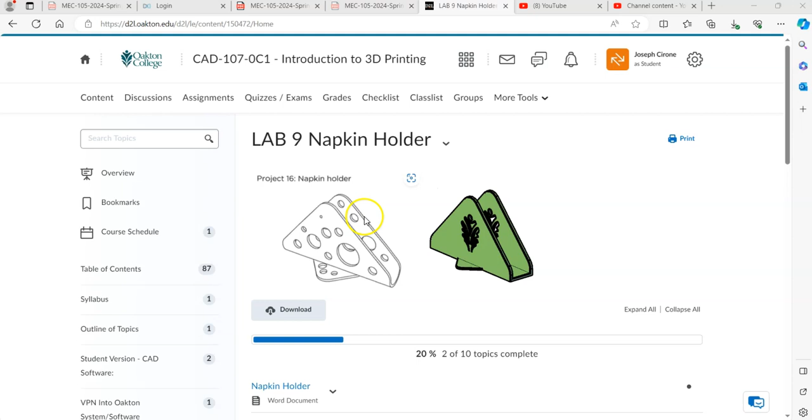Hi, Joe Cirone. Today we're going to model and print this napkin holder. We can find the dimensions right here.

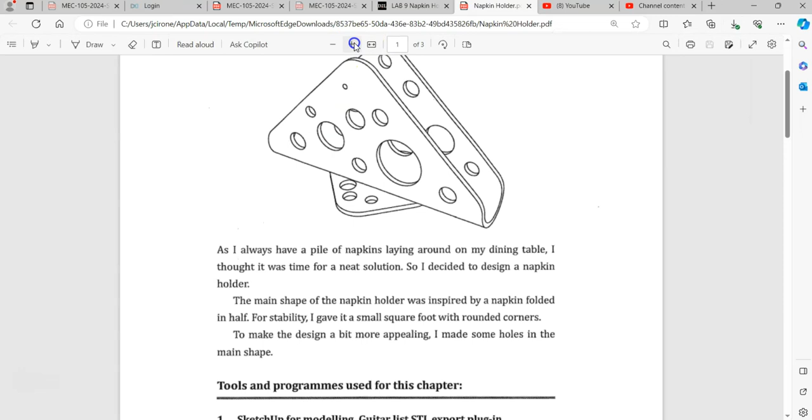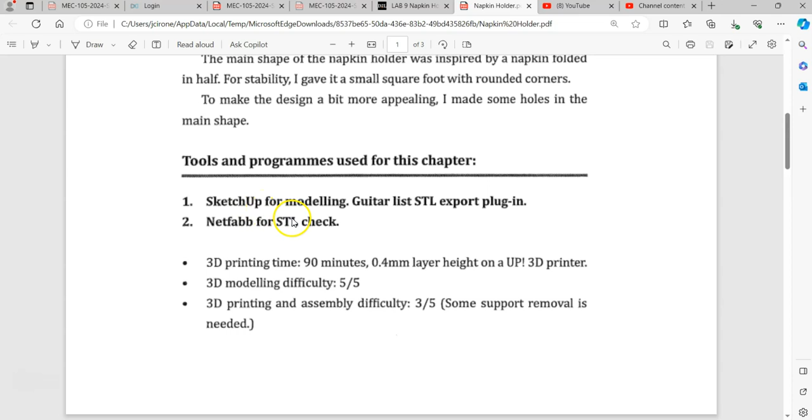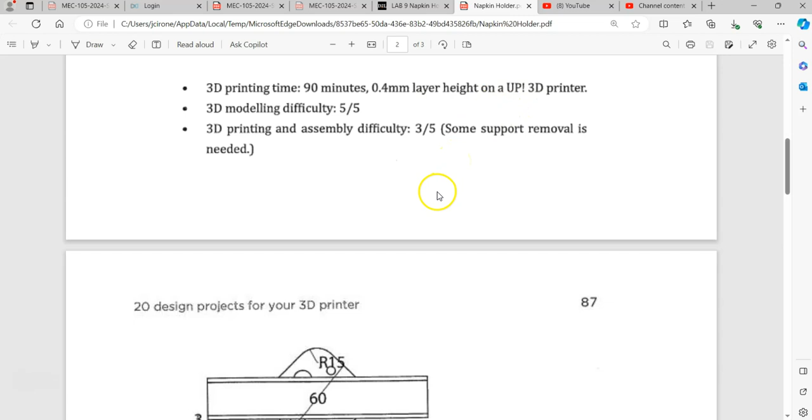This is taken from our 3D Printing Projects textbook, using SketchUp and then exporting the STL file. 3D printing time is 90 minutes at a 0.4 millimeter layer height using an UP 3D printer. We're going to print these on our Bosch Dremel and Ultimaker printers.

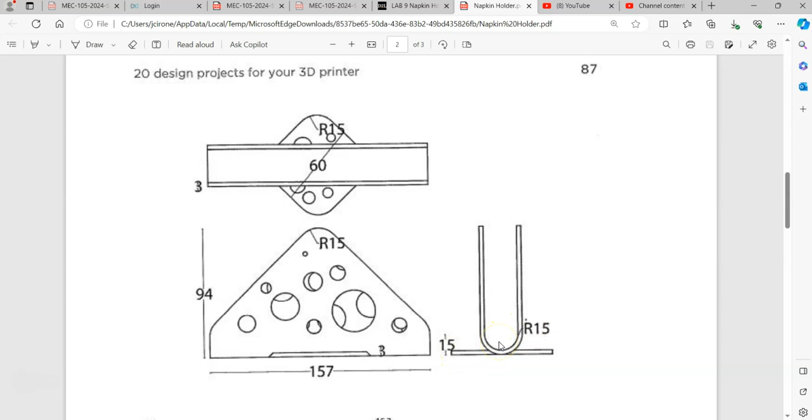The drawing is made in millimeters, and so we have this drawing that's 157 by 94 millimeters if we take the length and the height, and then the thickness and the radii are given here for these different features. We have the base, that's the base right down here that holds this triangular shape to the base.

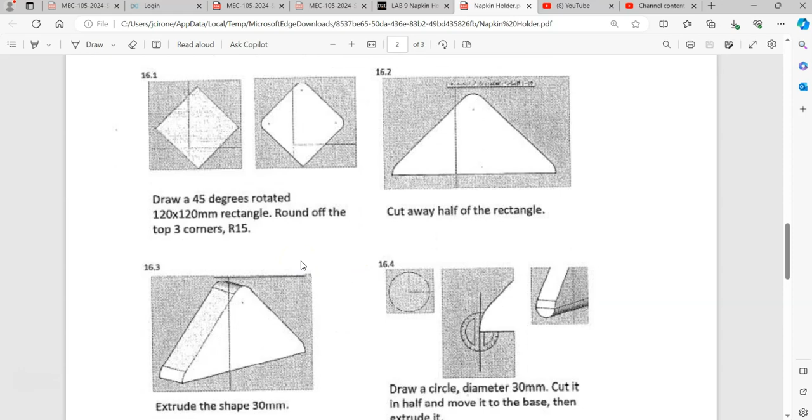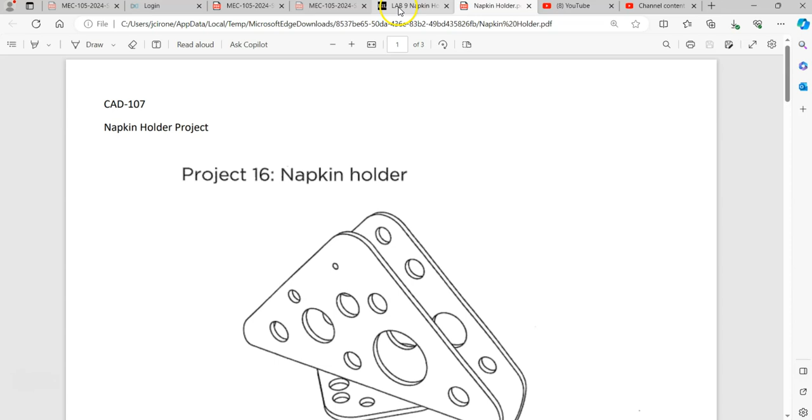Essentially they go through the modeling aspects for it. We've already worked with some of that, and so what I've done is I've given a student file.

We're going to work with the newer version, which is going to use inserts. So I'm going to download this file and open it.

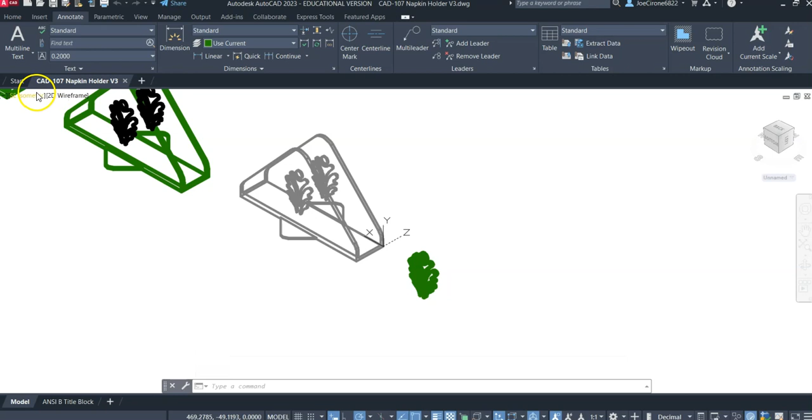This is an AutoCAD file, and essentially if we look at this in an isometric view with conceptual visual style, we can see that we have this oak leaf. What we're going to do is print the oak leaf using horizontal expansion, so it's slightly smaller and fits in here, kind of like a jigsaw puzzle.

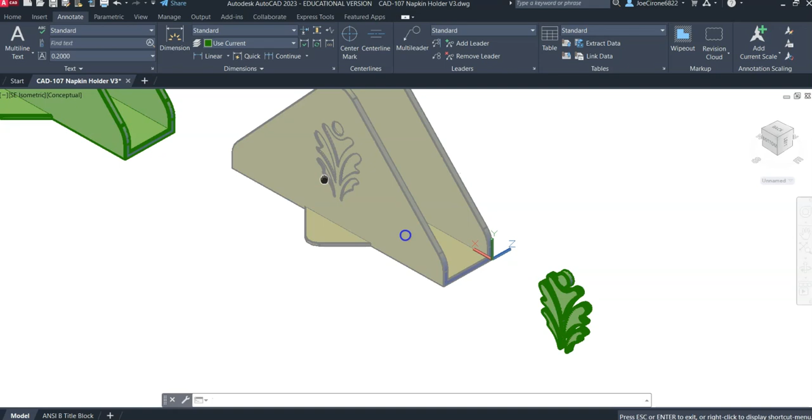And then if we look at how we modeled this exercise, we can go to a top view.

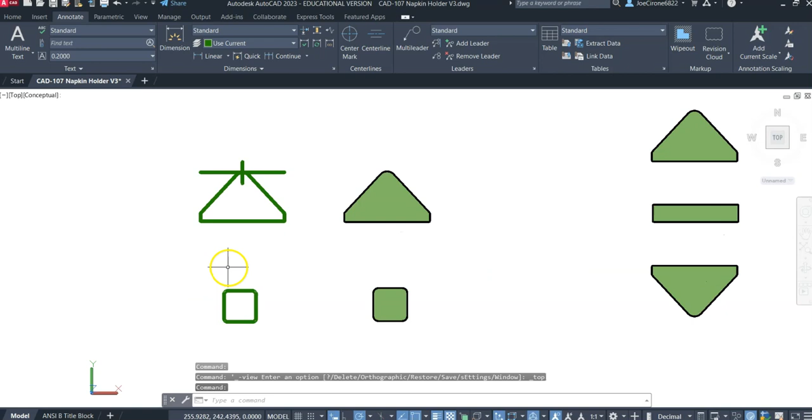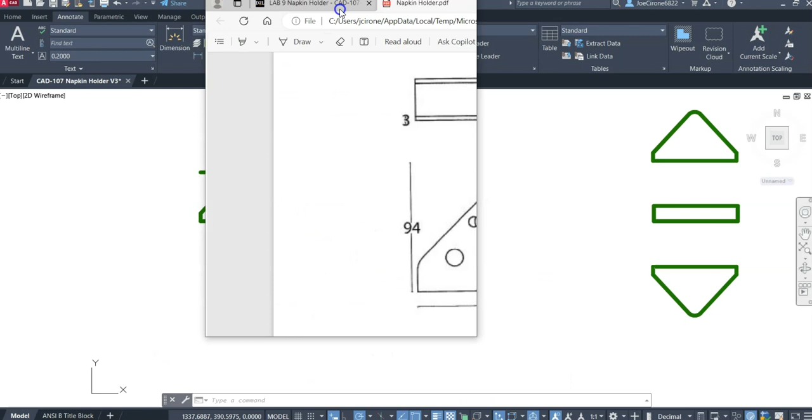If we look at our print, we have this triangular shape that's 157 millimeters by 94 millimeters. And so if you've opened up the student file like we have, we can analyze this, and we can see that that's 157 millimeters. And then for the height, we can just track a line.

From this intersection here, and if I click on that, we can see that that's 94 millimeters. And that's the dimensions that we want.

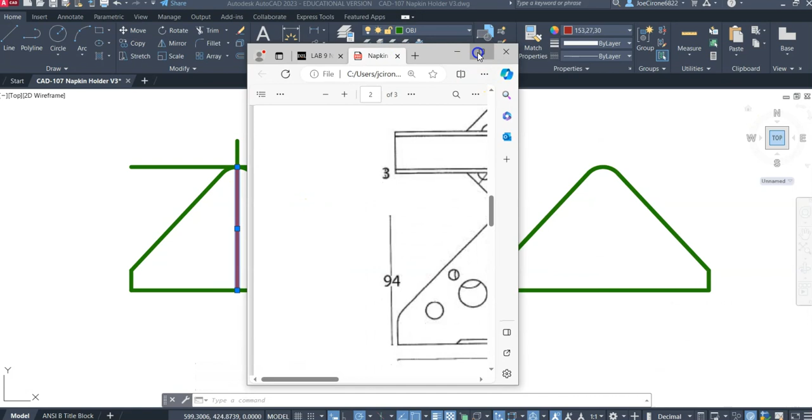So as we're designing for 3D printing, we want accurate dimensions. But as we're making certain products, this is sort of a consumer product, we have some flexibility.

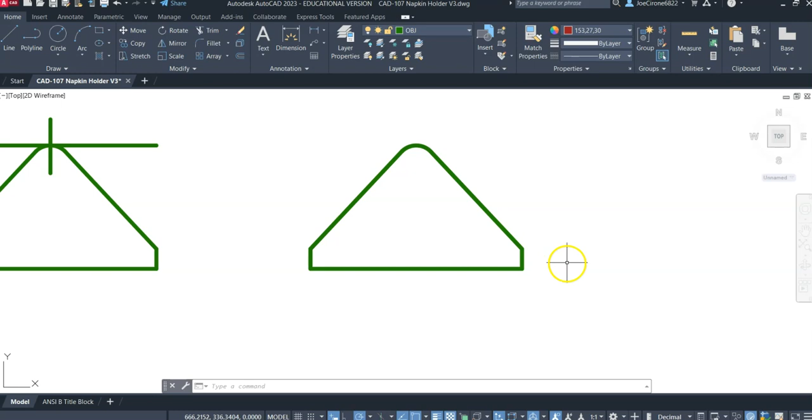Creativity. So what I've done is I've drawn that shape, or provided that shape, and then showing how that is modeled, trimmed it, gotten the basic shapes. And so these are the geometries, and notice that they're closed polylines.

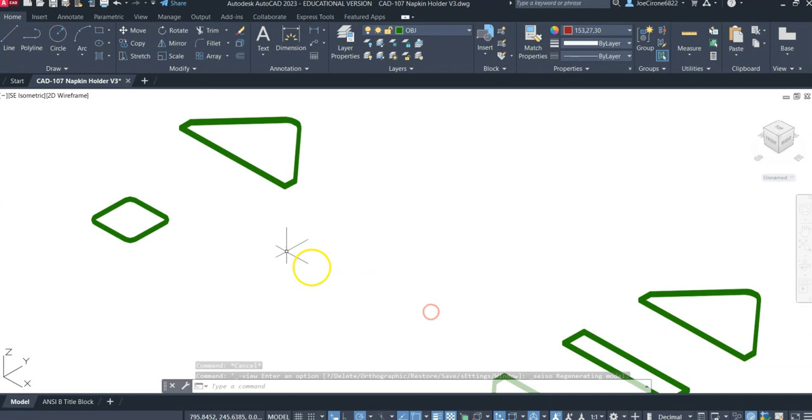And then what we've done here is to extrude these parts. So if we take an isometric view, here's the 2D geometry. And then what we did was we either presspulled or extruded it.

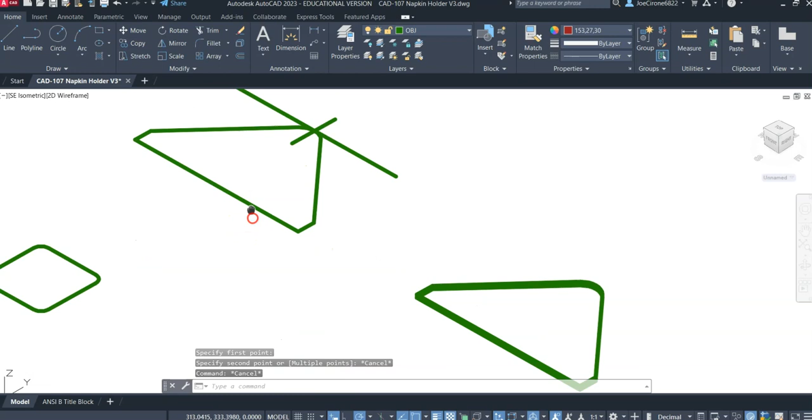If I measure the distance, I can see that that's 3 millimeters. And so to do that, what we would do would be using a 3D workspace.

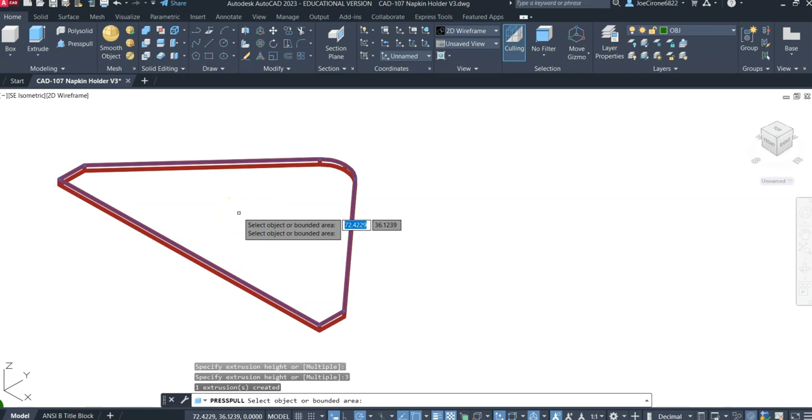We can either use extrude or press pull. Press pull is a little easier, we make that 3 millimeters. And then we can verify that with conceptual. All right, and so that's how this geometry was created.

And this is the base, and it's the same. If we go through and we look at the dimensions for the base, we'll find it.

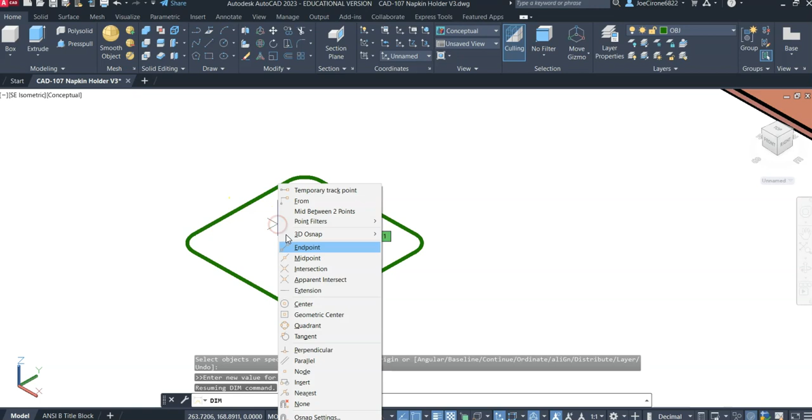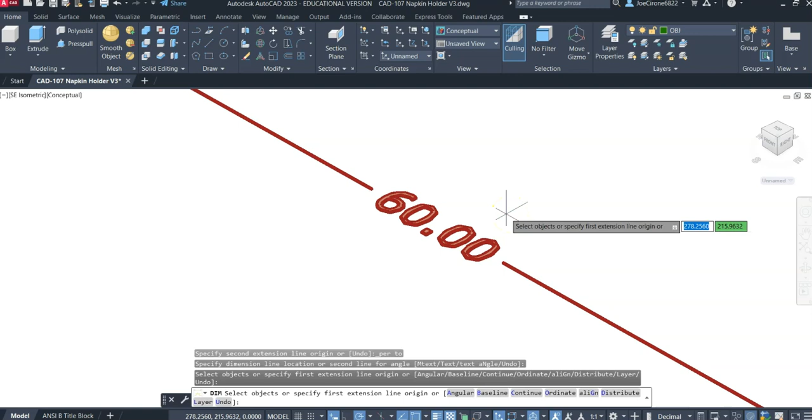We've got this 60 millimeter by 60 millimeter rectangle. And then we're going to take that rectangle, and just like we did with the other side, we're going to extrude that 3 millimeters. And then we're going to assemble it.

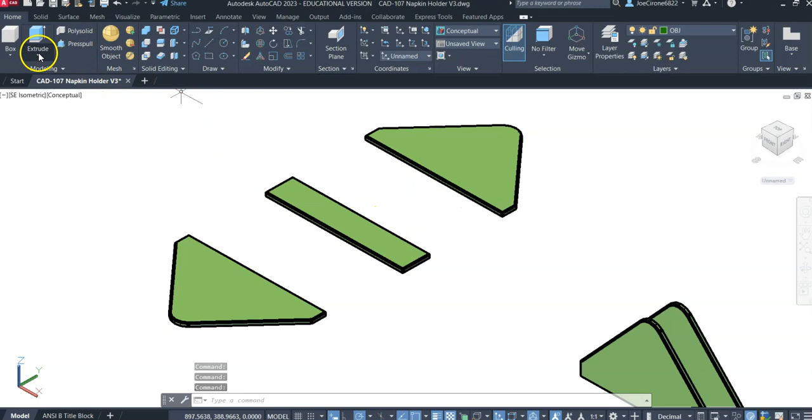And so after we've extruded these 3 parts using either press, pull, or extrude, we can use 3D rotate. We can select that geometry, hit enter, put the gizmo down here in the corner, and then we can select this red axis as our axis of center for the axis of revolution.

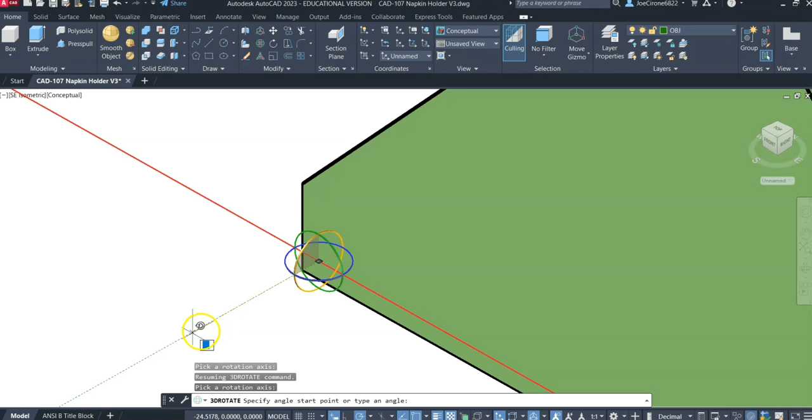And notice that I'm using polar tracking, and that's what this button is here. Polar tracking will keep things straight, but if you have difficulty with polar tracking, you could use ortho mode as well. And so we're going to rotate this one as well.

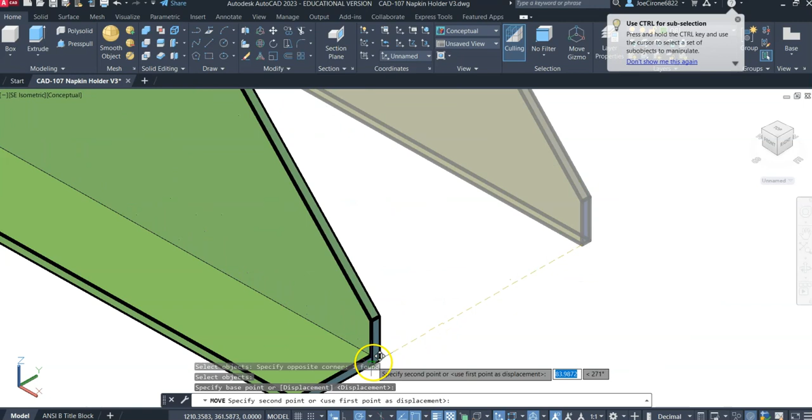And before I rotate the other one, I'm going to put it together. So what I'm going to do is move it, and we can just use regular move commands from this end point. This end point.

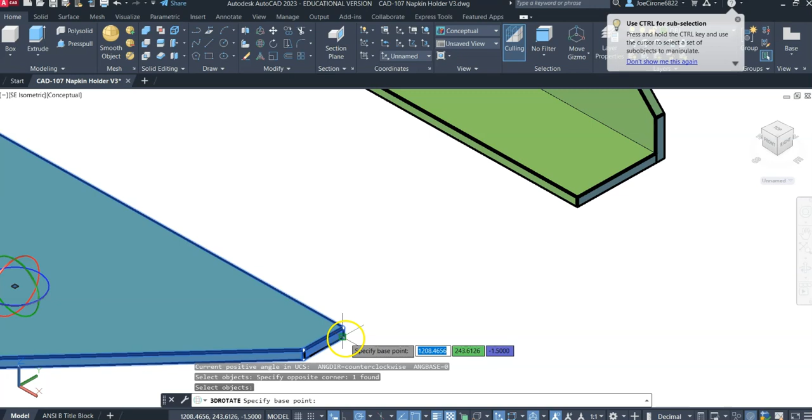And then the same thing with the other side. We can 3D rotate that. Place the gizmo at the corner here. Select the axis of revolution. Track that north, and then track that this way. Move it.

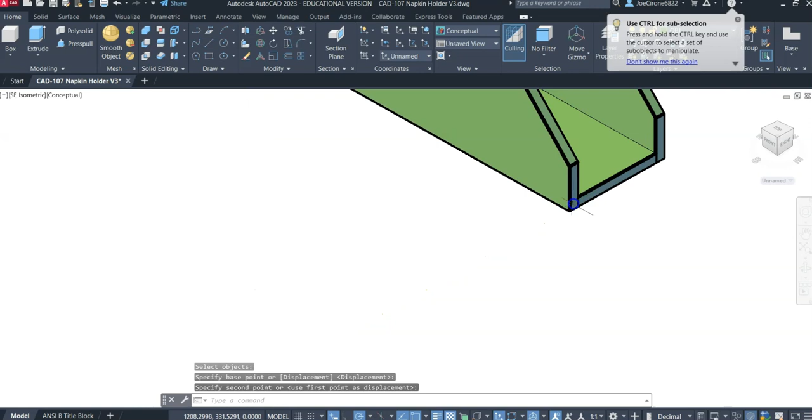Once we have created that, we're going to union that together. Unioning it will be like glue, because we could still move these components otherwise - they're not glued together. So once we place them in the proper configuration, we'll union those, and then we'll combine them.

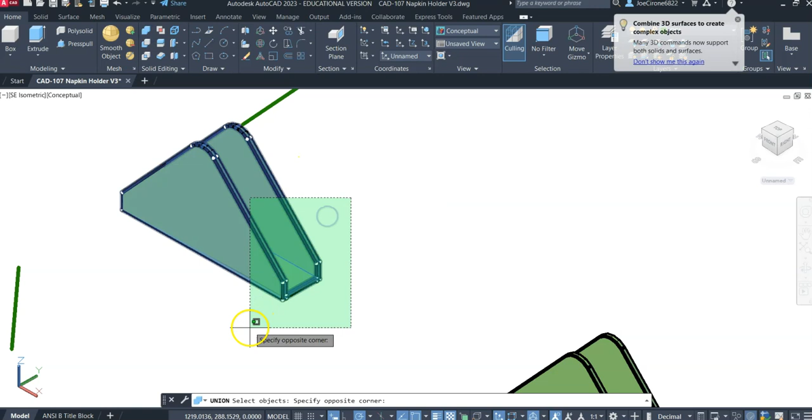You can see we've extruded this bottom shape as well, and I placed that bottom shape on the bottom here. That's a little bit tricky. The way I would do that is to move it in wireframe and place an X on the bottom of the geometry, so if I were to repeat that, we want to be able to move this from this intersection to this intersection.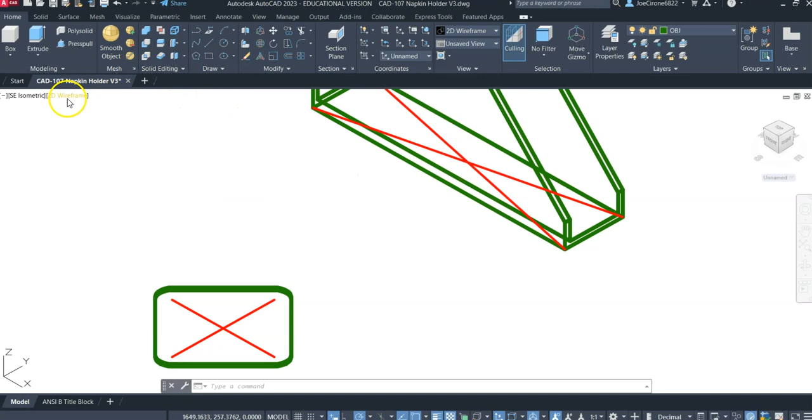If we were to select the move command, you can select move, hit enter, and then move it from this intersection to this intersection. Verify it, conceptual, and then we would union that together as well.

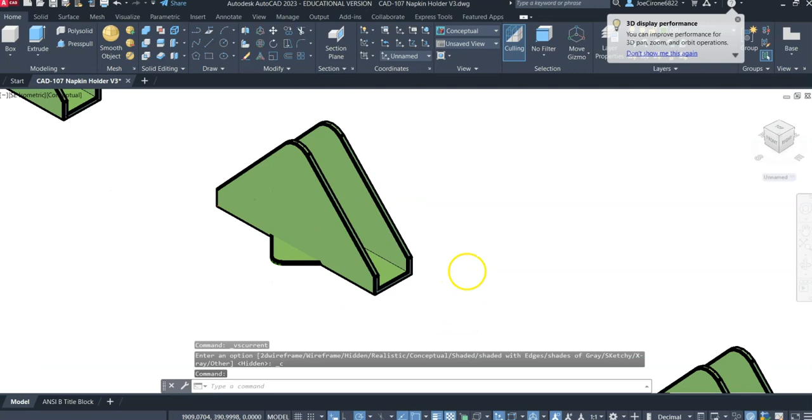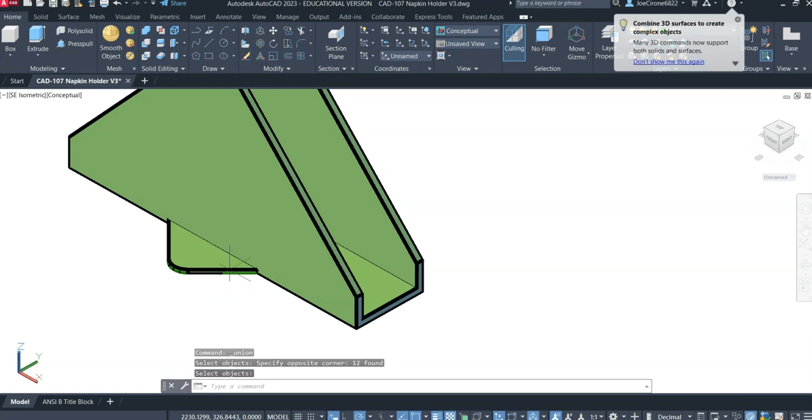Once we have those shapes, we would union those - same process. I can see that these other ones have been unioned, this one is not. So what we would do is union that: select these 2 shapes, hit enter, and now they're treated as one solid geometry.

So to create and put the oak leaf onto the napkin holder, what we want to do is extrude this, and we want to extrude that. If I check this piece here, let's see.

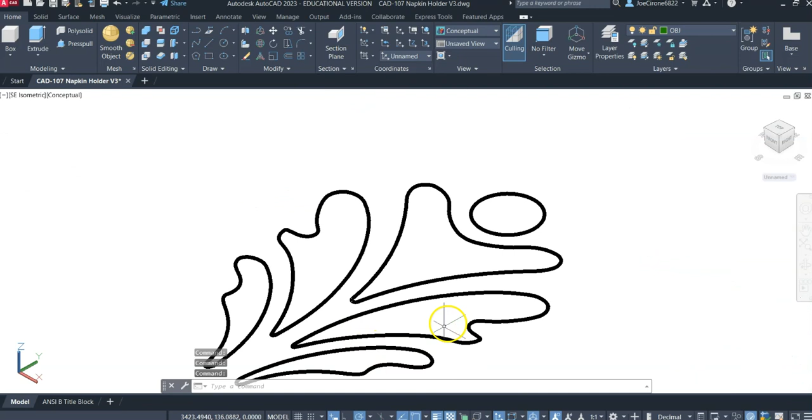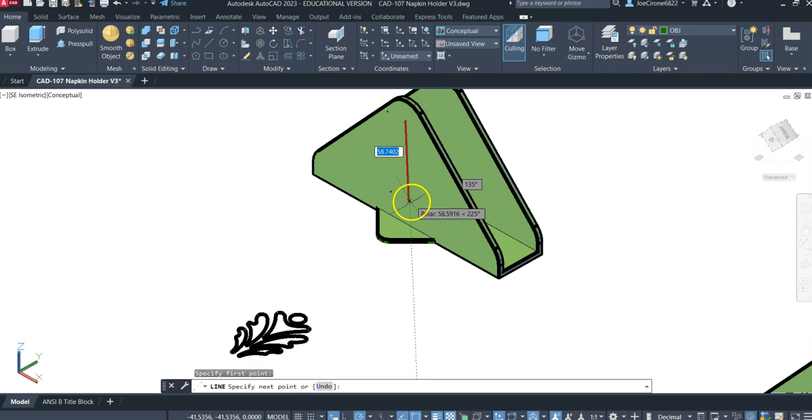We're going to extrude it 2 millimeters, and then we're going to subtract it. We're going to line this up with a line from the center here, and I'm just going to track this down in the Z direction to this midpoint.

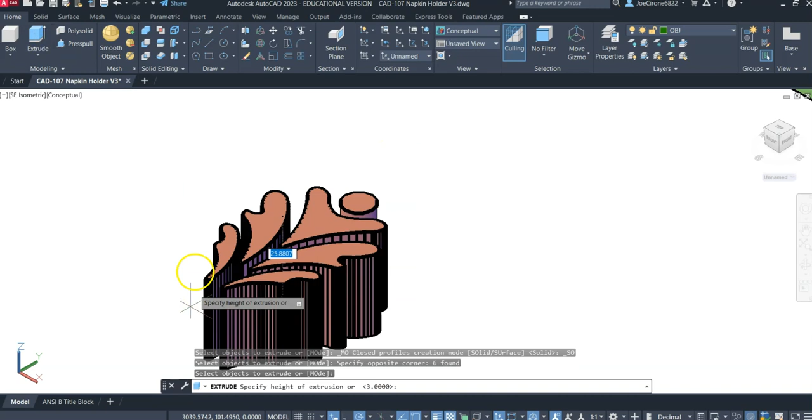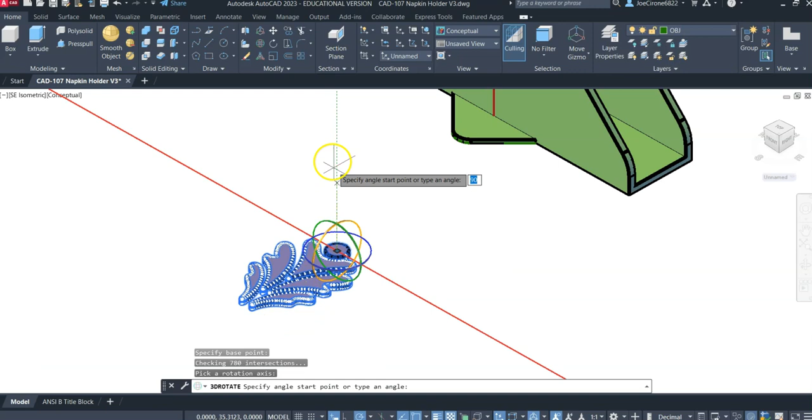And then I'm going to extrude this 2 millimeters. And then what I'm going to do is I'm going to 3D rotate it and move it. I'm going to put the gizmo right at the center here, and I'm going to select this as my axis.

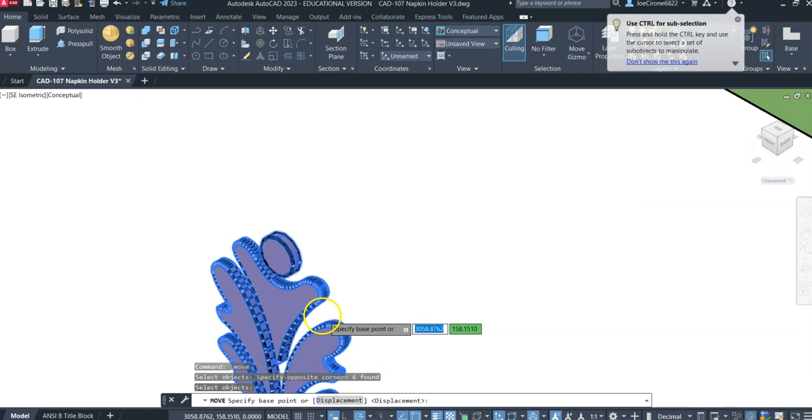And then I'm going to move it again over to this area here, and I'm just going to place it on this with a nearest O snap. We want it to be attached.

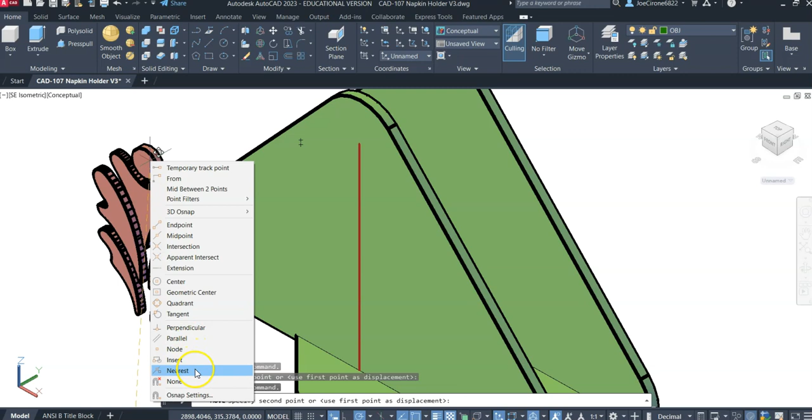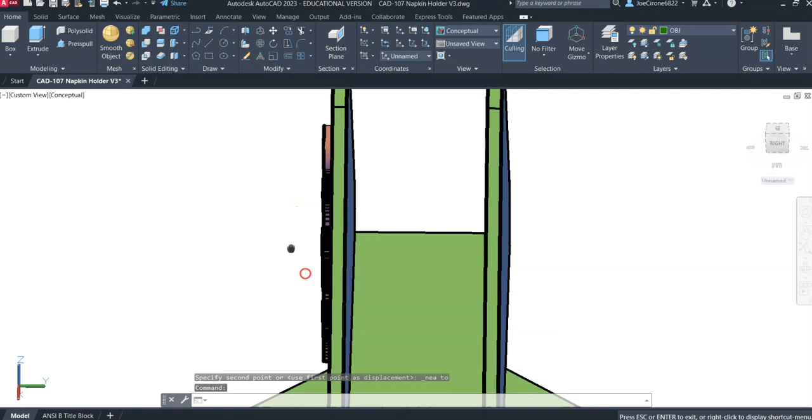Now that I have placed that onto the face of this other part, what I want to do is press it in just a little bit and then subtract it. So we're going to use a 3D move command here, and then we're going to subtract it.

One trick that I like to do is create a copy of this line, but actually I think I have a second set of geometry there that's going to be fine.

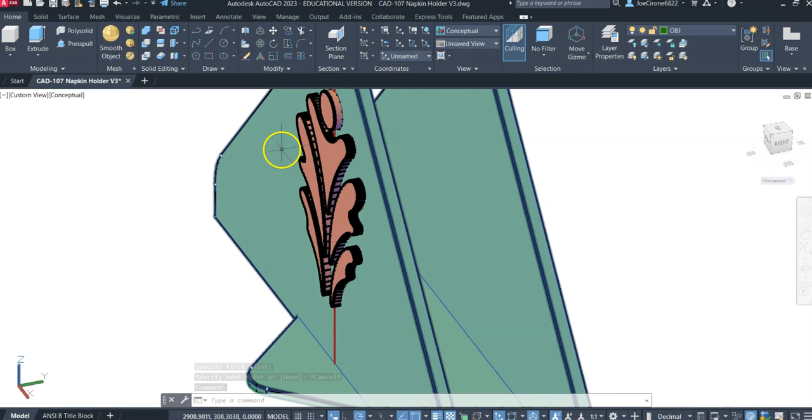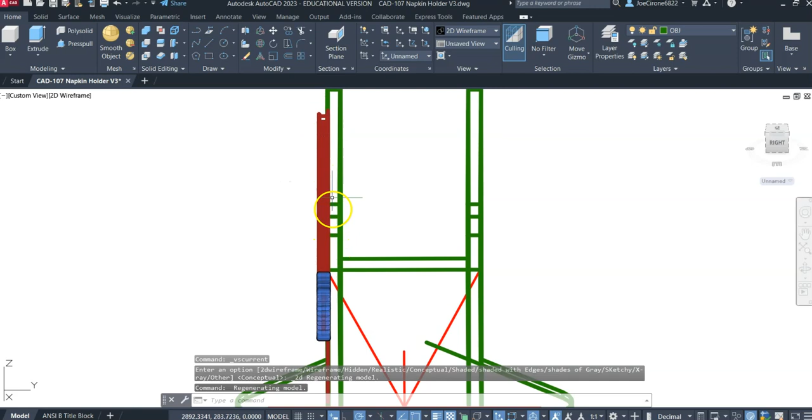So we'll subtract this, but before we subtract it, we need to press it in just a little bit and then subtract the geometry, because right now we just have the two surfaces against each other, and we can see that in a 2D wireframe. If we look at that, this does not intersect with this green geometry here.

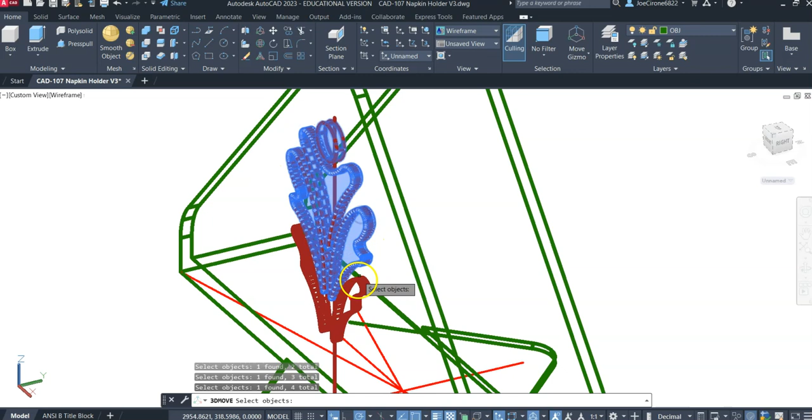So we're going to make that so that it does by using a 3D move command. We'll say 3D move, and then select the geometry for the oak leaf. Hit enter, and then grab this axis right here and push it in 2 millimeters.

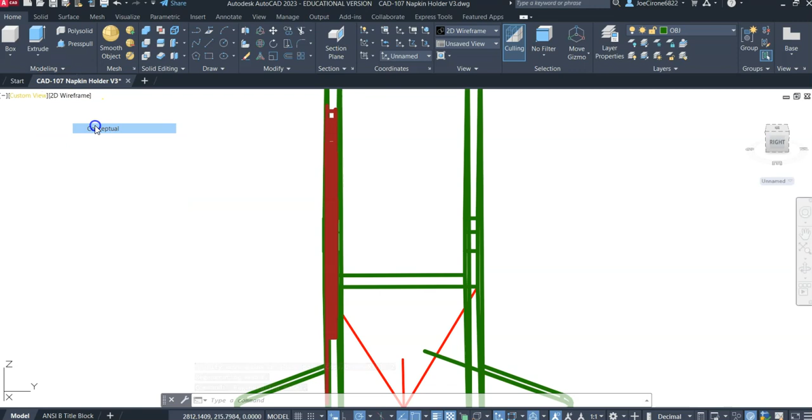If we look at that, holding shift and the middle mouse wheel, we can now see that it goes in. Let's check and see if we didn't bring it too far. It goes up to the face, which is fine.

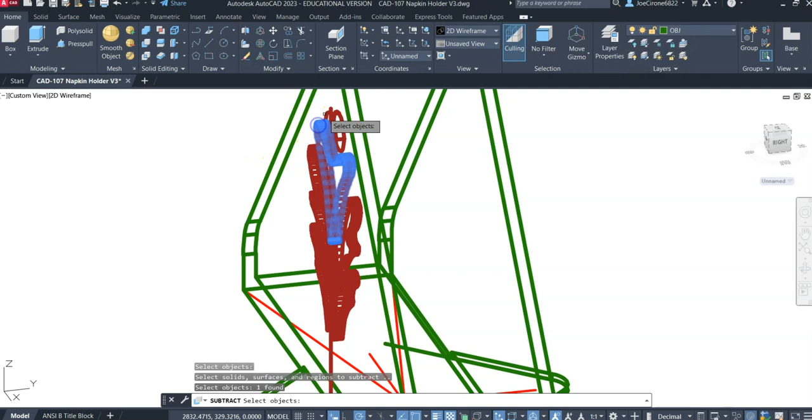We're going to go back to 2D wireframe, and then we're going to subtract that. We'll choose the large shape first, hit enter, and then the geometry to subtract from it. If we hit enter, and then if we shade it, we can see that that geometry now creates kind of like a jigsaw puzzle shape for it.

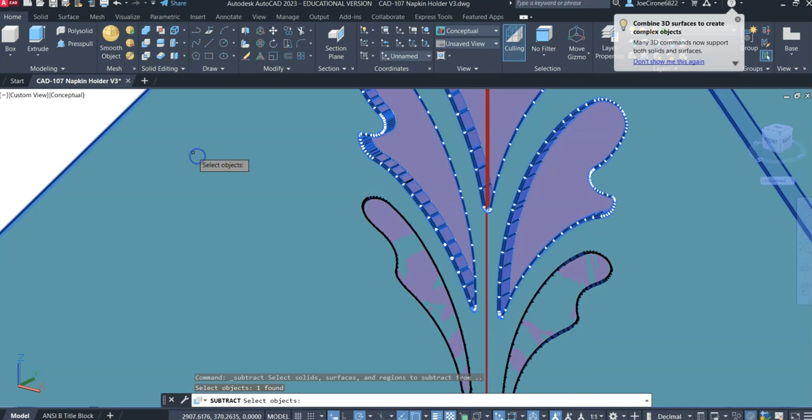And then we can do the same thing for these other two components right here. So we'll subtract those, choose the larger shape, hit enter, and then these leaf geometries. We can map it to the back side of it just the same way - we can bring this over here to this side and subtract it. But for the sake of making the video, I'm going to go on to the next component.

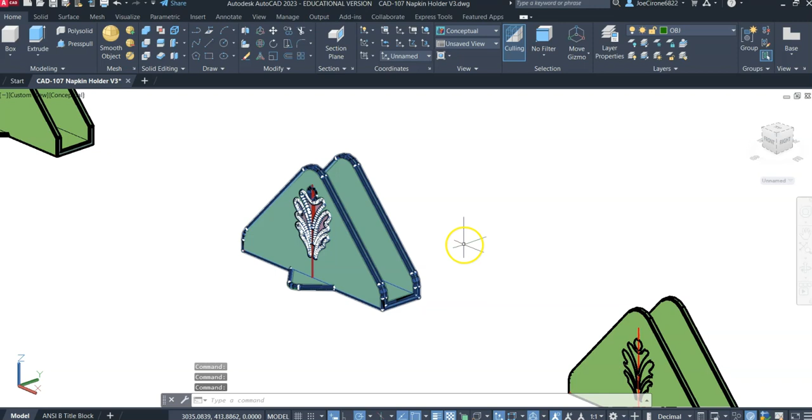Now that we have created the geometry for this, what we're going to do is bring that into our slicer, and we're going to bring in the STL file for that. So what we'll do is export this, and I usually just put these in my downloads.

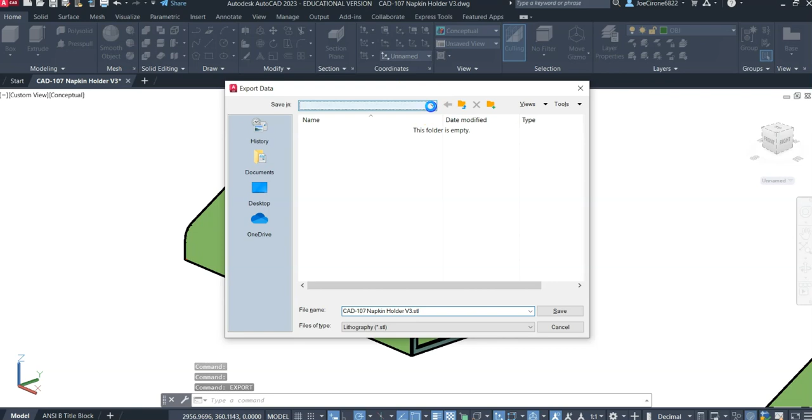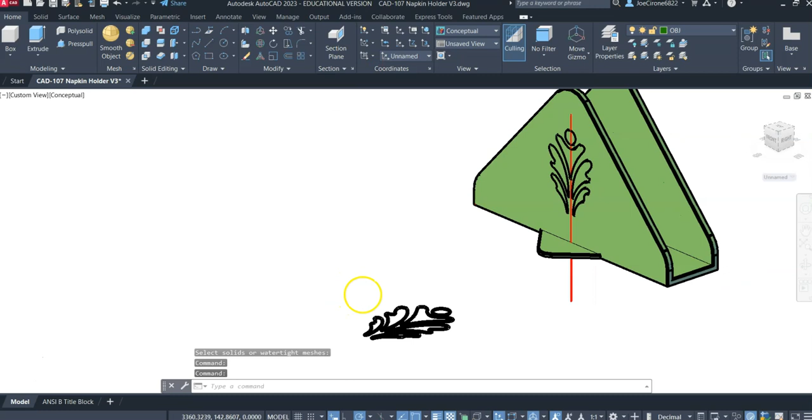We'll select that geometry and hit enter. Then we'll also export the oak leaf. I have another geometry right here, and I'm going to extrude this 3 millimeters.

So I'll have an extra millimeter of overhang. We'll say extrude, select this, hit enter, and then move that up. We'll type in 3, enter. And then we'll export that.

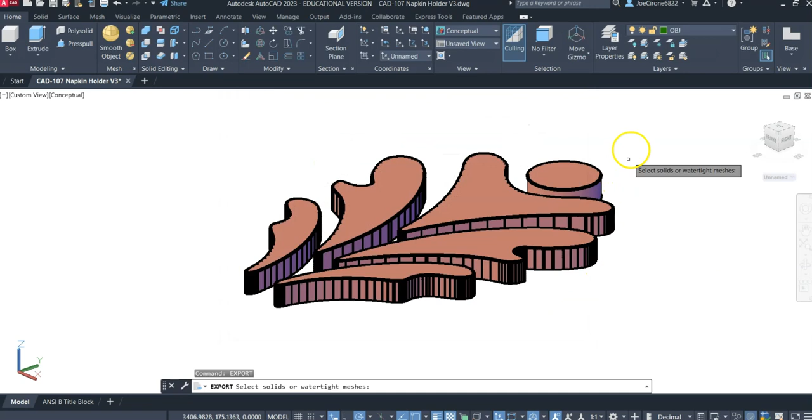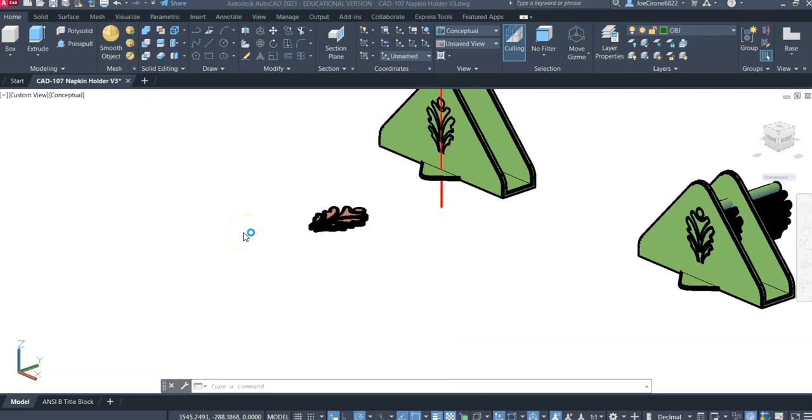We'll select all of the geometry and hit enter. Now that we have exported the base for the napkin holder and then the logo, we're going to go into our slicing software, the Dremel slicer, because it's a single nozzle extruder. If we want to work with 2 colors, we'll make like a jigsaw puzzle type of effect, where we use two different machines or two different filaments with different colors.

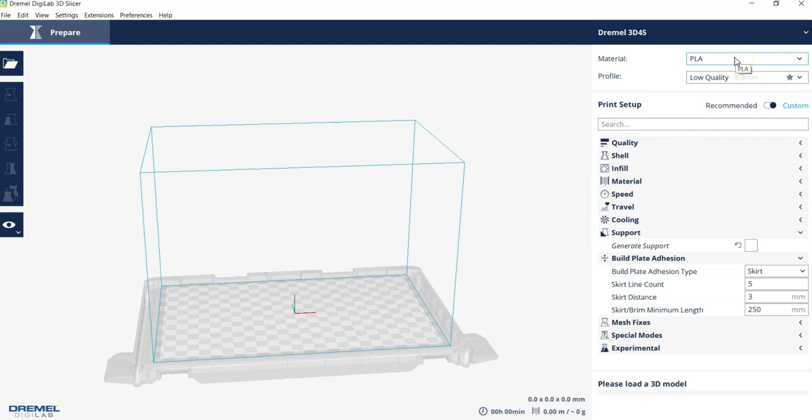Alright, so here we are in our slicing software, the Dremel 3D 45, and we can see here's our platform, our build plate. We're going to be using PLA, polylactic acid, and we're going to go open up our file. We'll say File Open, and I'm going to bring this in from the downloads, and I'm going to bring in the napkin holder geometry.

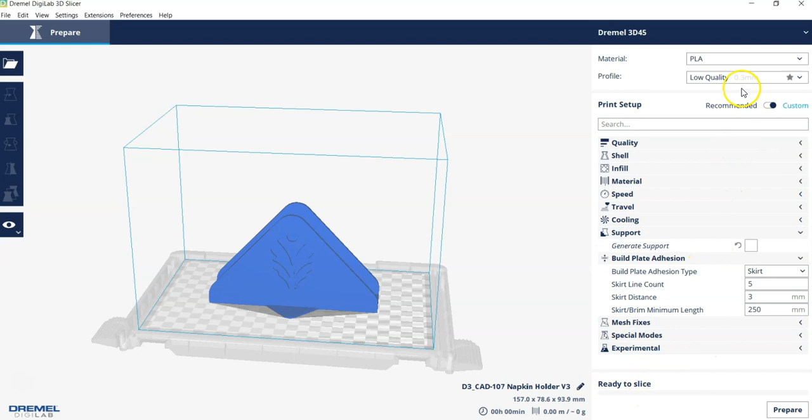And the orientation came in just fine. If we look at this, I don't think we're going to need to generate any support. We're going to set this up at low quality, or 0.3 millimeters. For build plate adhesion, we've got a skirt which will just prime the nozzle. We can bring this down to a brim, and I'll show you both of them. Let's go with the skirt first, and we'll prepare it.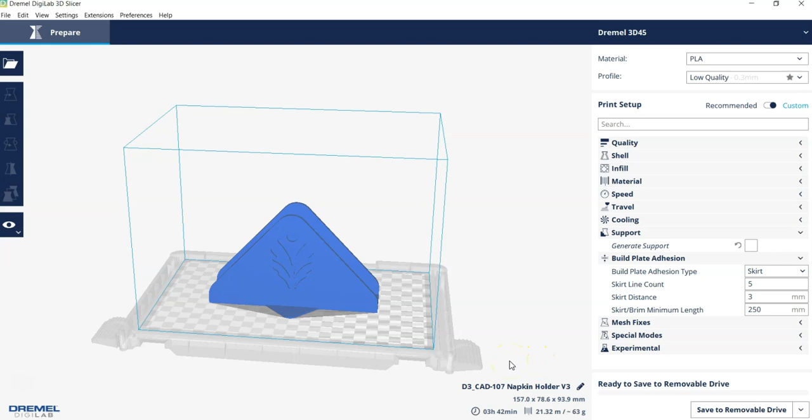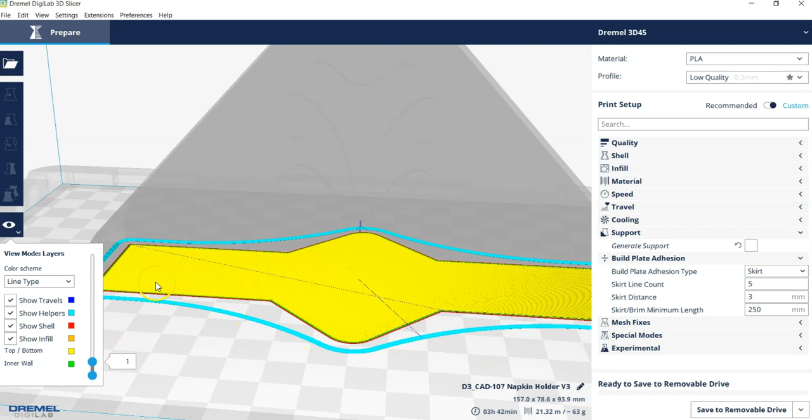If we look at this, the eyeball here and the layers, we can see that basically the skirt just primes the nozzle on the first layer. And if we bring this all the way down to layer number 1, that's basically the first thing that's going to be printed. It doesn't really hold the product to the build plate, so if we wanted to change it, we can change it to brim, and since we've made a change to the model, we need to re-prepare it.

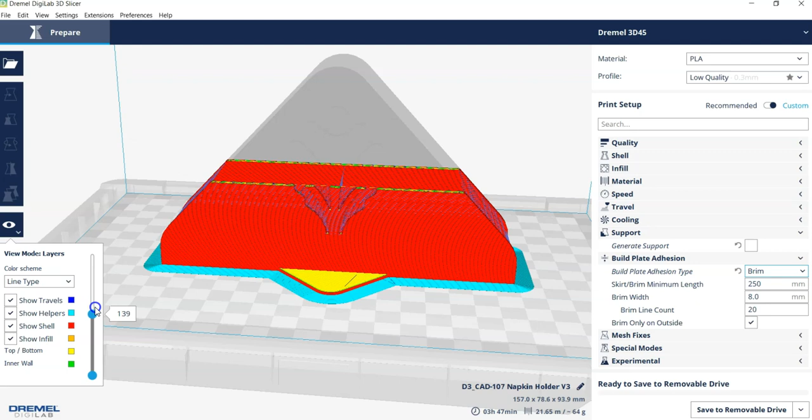That will hold the build plate to the part much better. As we look at the model, this will keep it from peeling off of the build plate and giving us some problems. So this looks great. We would go ahead and save this to a removable drive and print it. You can change the name here. And I'll save that to my removable drive.

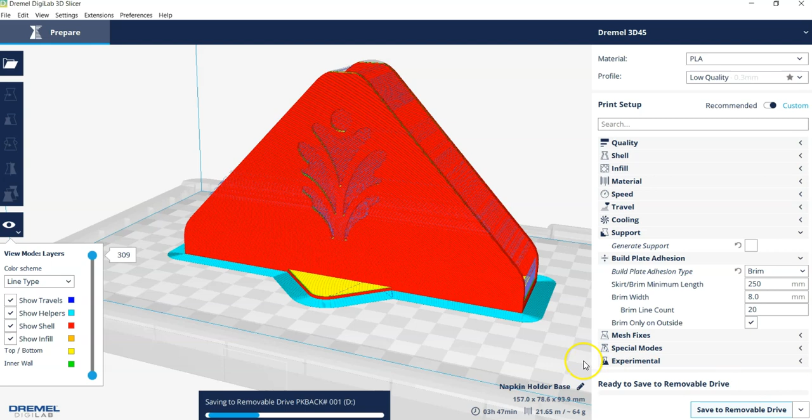The next thing I'm going to do is delete this, and then bring in the oak leaf. I'm going to leave all the settings the same. We didn't make any changes to the geometry to account for tolerance, but the oak leaf needs to be slightly smaller so the pieces will fit together.

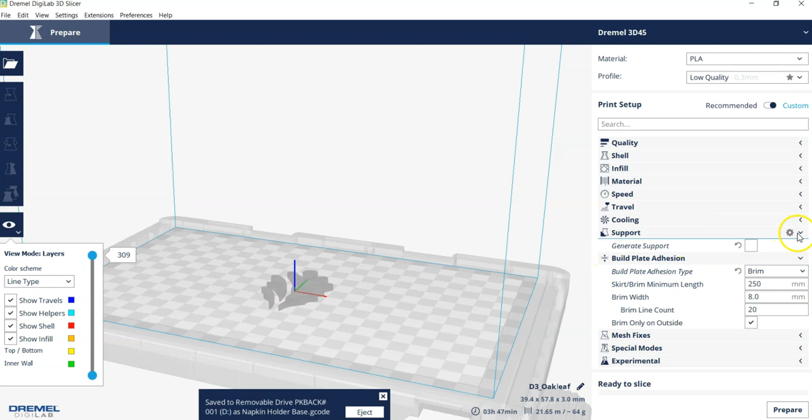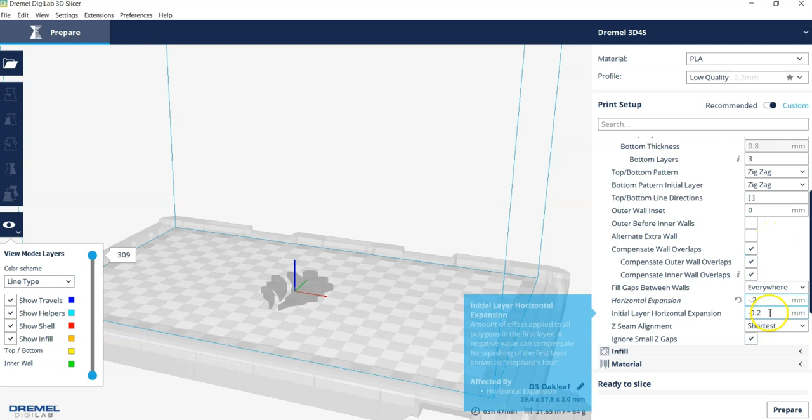There's a factor in our slicer that'll allow us to do that, called horizontal expansion. So what we're going to do is adjust that. Here's our horizontal expansion variable, and what I'm going to do is set the gap to minus 0.2. And then I'm going to prepare this.

Now for this part, I'm not going to use any of the build plate adhesion because it's going to take a long time to post-process it otherwise, and it's a very short print, only 13 minutes. So we'll remove that.

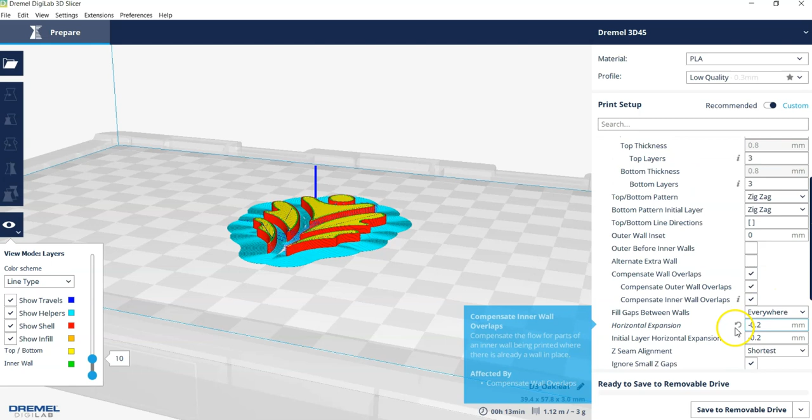So we want to set our horizontal expansion to -0.2. And then we want to change our build plate adhesion, and we'll just use a skirt, which will just prime the build plate.

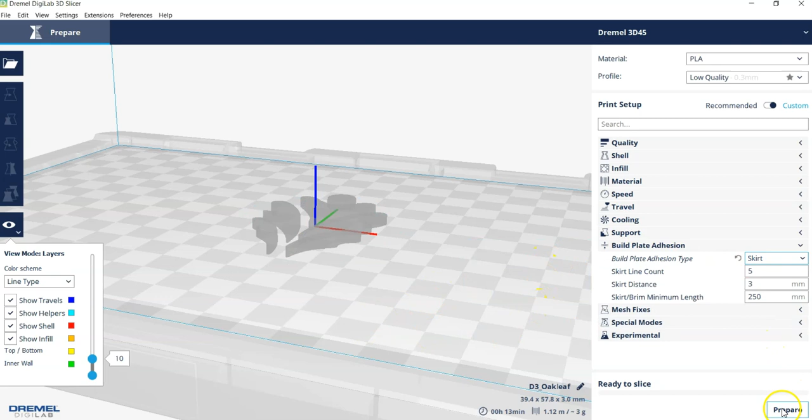Alright, so what we'll do is print this one in one color, and then print the other one in another color, and then we'll take a look at those on our 3D printer. If we look at our layers, we basically got 10 layers, and we're going to save this as our oak leaf, and then we'll make another video to show how the print worked. Alright, that completes this video.